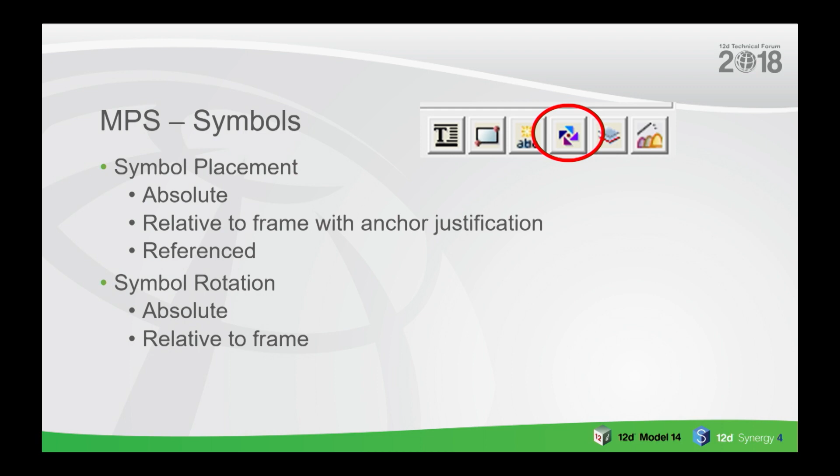Symbols, much the same sort of thing. You can place symbols absolute or relative to a frame, but you can also anchor them to a position in the frame, like a north point. You might want to anchor it to the top left-hand corner of your frame. The other fantastic thing is the symbols can actually rotate as well. If you rotate your view, the symbol will rotate to it too, relative to the frame or absolute.

We had another option in there called plot millimetres to units, or plan units, or something like that, and we only had 3 options we could ever use. Now it's unlimited. We can select many different models that will plot in different spaces. A lot of people will use that for plotting notes on the sides of their plans.

Some of the new features: what you see is what you get, like a preview, which I'll show soon. Auto PDF file naming, so it will use the chapter name, your book name, or your page name, or you can have overrides and also attributes.

The one that I love is view favourites. How many times has somebody gone into your job and turned off a model, deleted a view, or done something? You can use your view favourites to set in your plotting.

Whiteouts behind the frames - this one is really cool. It was asked in the survey conference: highlighting your current frame in a detailed plan. You might have many frames running along the road, but which one are you actually looking at? It will actually highlight what's there.

You can plot just the book only, the chapter, or the page, and referencing. I'll go into referencing a little bit later.

There's a really nice flash menu on the MPS. The refresh button is just a treat. You can make views, notes, symbols, or anything active or inactive. You can insert new, that's the button that actually gets something to start. Copy and paste, I'll show you an example of that. Moving up and down the tree. And also, this is another one: applying a map file to a frame.

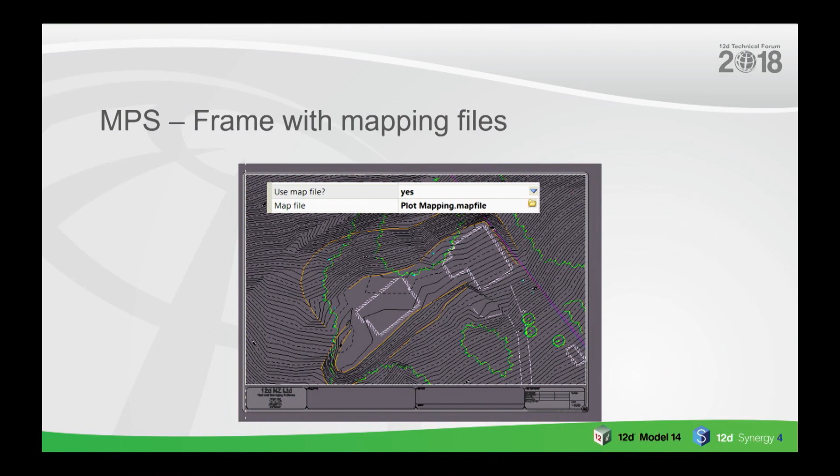How many times have you got your contours all pretty and green, but you want your contours on a plan and want to dumb them down, so you can apply a mapping file to grey those things out? Or you might be doing a stormwater plan and want to show the other surfaces, so you can grey out those other surfaces by running a map file. So that's a frame without a map file, and that is with one. You can change the colours just by applying the mapping file.

The magic chapters: the limitation of a single frame is you can only do one cross section at a time, or one long section at a time. What this is going to do is let you have magical cross sections appearing, long sections, your drainage long sections, and also a model of plot frames. So you might have a whole lot of plot frames placed down a road, and it will plot all of those.

Now, for my magic, I need probably one more number. Could somebody shout out another number? Any number? 8. Okay, 15, thank you. So, actually 8 and 15 are a bit too easy. The 15th prime number, I imagine one of you guys will know whatever that is. We need a programmer - pick any programmer that you want. Peter Tatum, okay. This is so easy. 8. Somebody worked out what the 15th prime number is? 53. Thank you. 8, 53, and Peter Tatum. That's going to be harder.

Okay, now I'm going to go live.

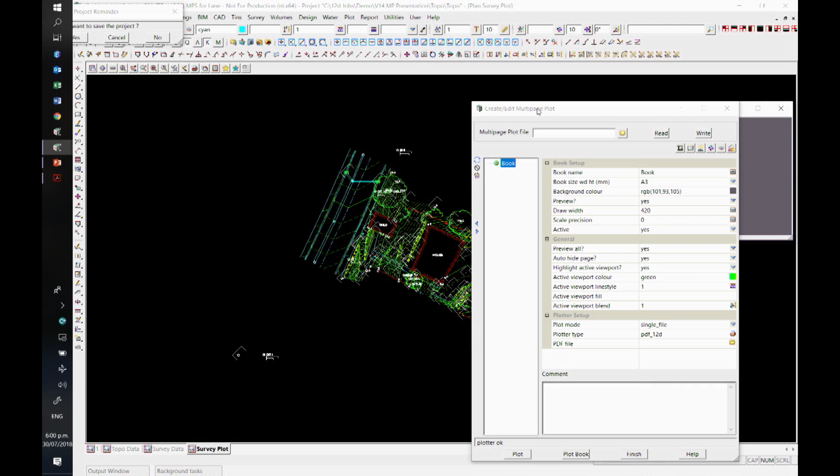Now, just doing a simple plot. I just want to create a quick plot to walk out the door using MPS. I just go plot, multi-page plot, and create. We've got our panel, we've got our preview, and like anything else, you would actually read in a standard file. So I pick a file, read, pick this one here, and read it in. This is one that I've actually just created.

So I've got a few standard things in here. You've got your title block. I've got some text with word draft. I've got my page numbers, some CAD notes, which you can select a model to actually refer to. And I've got my plan frame with a north point.

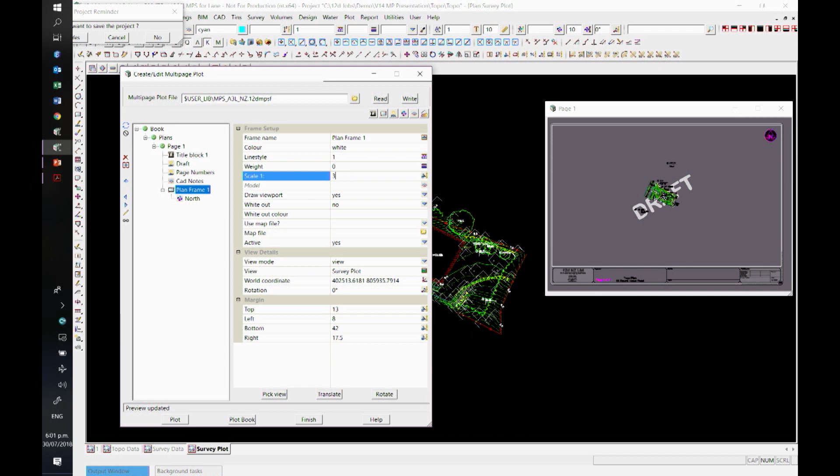So I want to do a plot, pick my view, pick, accept, and change my - so I've got my view in there, looking good, change my scale. So that might be 350. You can use any scale you want, as long as you have a scale ruler with that on there. You can see I was really fun with my tech drawing teacher.

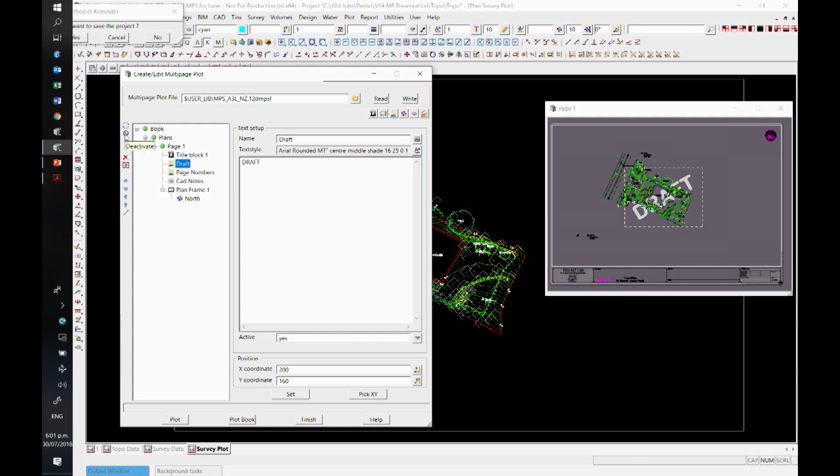I don't want the draft, so hey look, all I do is just make that inactive. So that's now inactive. Really it's just a matter of going plot, and that's it. And that's going to go and generate my plot.

A couple of things that happen - the plot sizes have really been reduced quite considerably. I've got one that has many, many pages, and it's about 8 megs or something like that. This one will come through at whatever size it's going to come through at. It's going a little bit slow because my computer doesn't like working through a projector, I don't know why, but yeah. But that's a plot - it didn't take very long at all to actually do that. You can see that it's quite simple and quite easy to do.

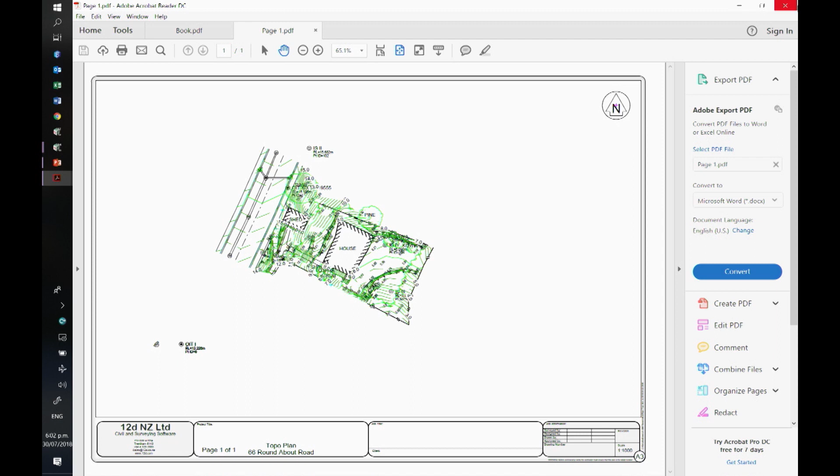So I just close that one down. If I was going to make one of these up from scratch, quite simple: plot, multi-page plot, create, and there is a magical button - this is it here, it's called insert. You can't go anywhere without using that insert, okay? You start trying to build something up, you've got no hope.

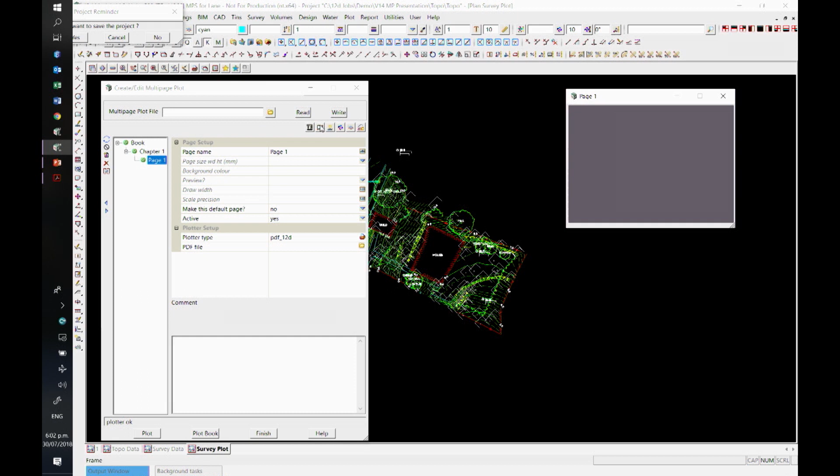So magically insert a chapter and then a page, select your frame type, plan, and then you can just draw a frame. Really easy. You've got all your nice edit tools now, you move things around, really comfortable.

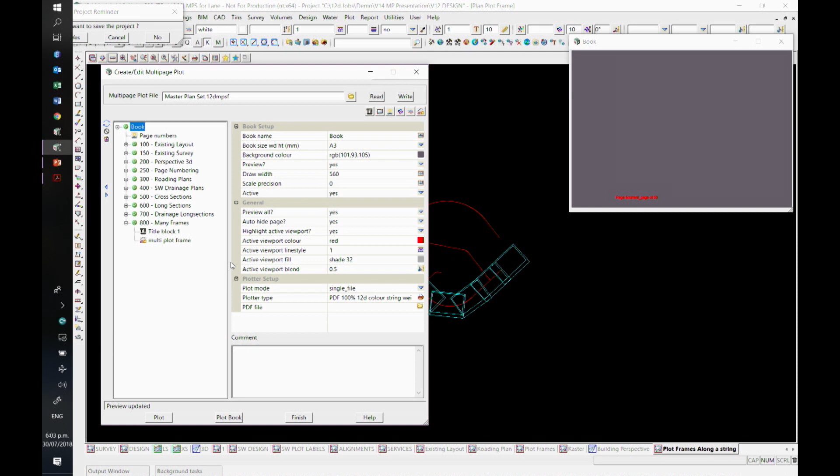But like every good presenter, we have a pre-done sort of file with a lot more information in it. I'll open this up and show you a little bit more. Am I going okay? Yeah, okay. So I've got a book level, and what we've got is defaults.

So what I tend to do is fill everything out at this book level, so everything else will refer back to the book, the major settings in that. So here's my preview, not a hell of a lot on there. If I want to change the size of my preview, I will. I'll just go up to 720 and just make it a little bit bigger so you can see. I'm not going to - obviously you'd probably have it a little bit bigger when you're back in your office with your triple monitors, and you can have that all over everywhere.

You've got a few options down the bottom here: active viewport colour, linestyle, and fills and blendings. So if you actually have a frame to be plotted, it will actually highlight in these particular colours. I'll show you an example of that.

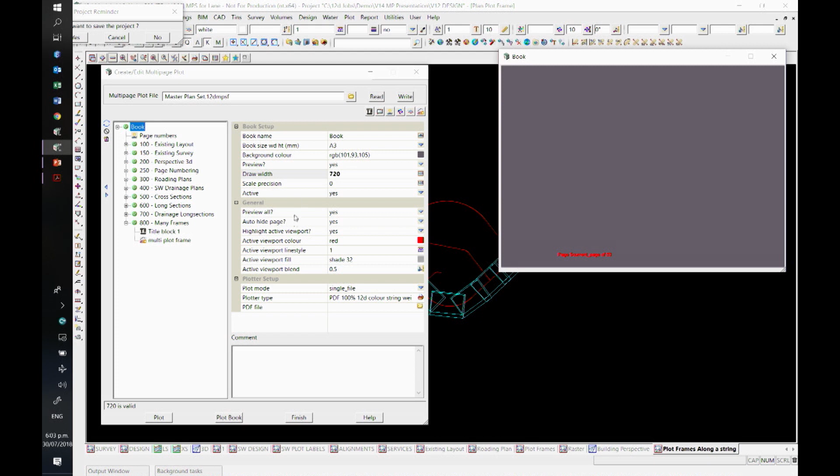I've got an example of my page numbers. I've actually got a cover sheet, and this cover sheet here I've actually made inactive for the numbers, so you can do all that. And I've got a title block that I'm actually not using anything on.

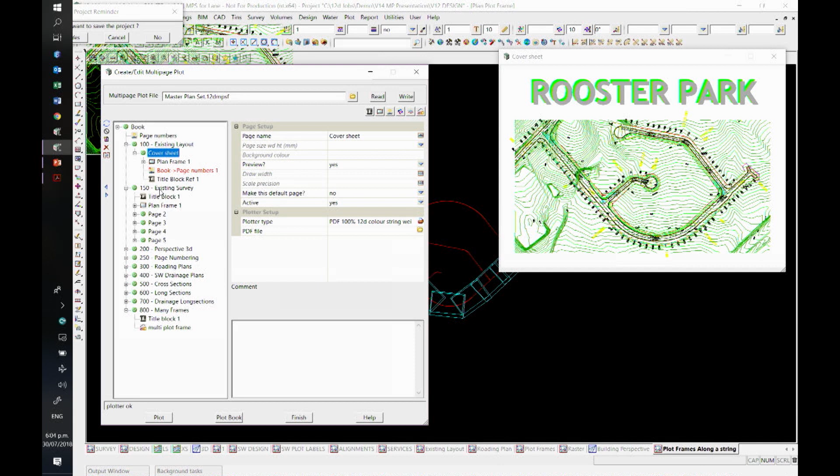My survey sheets - so what I've got is 4 pages. I've spent some time to actually locate the frames on my page correctly, to cover all of my area of work. I am referring to one single view, which is my plan frame, which is actually looking at my survey view here. And I haven't got any coordinates for my frame.

So at a page level, all my frames have their own coordinate and their own rotation, but I don't have a view selected here. So what that means is I can place my frames out, get one part of my tree all copied, all created, and then I would actually go and copy this entire chapter and just go and rename the actual view that it's actually looking at.

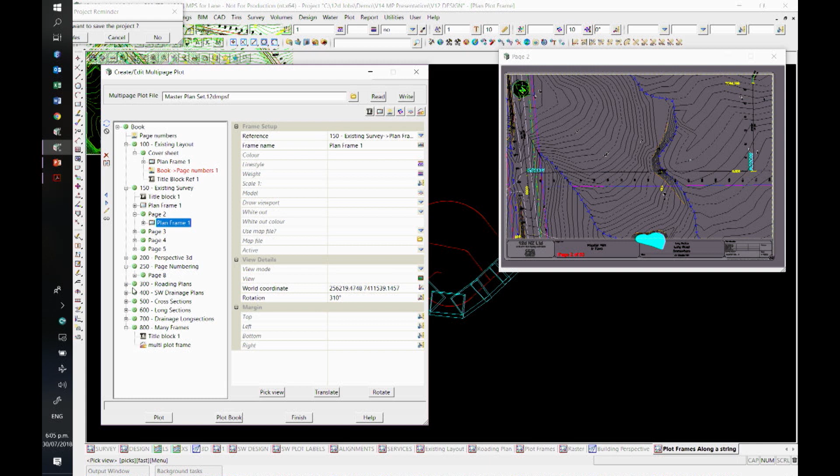So say for my roading plans, this is only just looking at my roading plan views. So all your sheets and all your frames will actually always line up into the correct locations. You can see here that I've got a location diagram, with all my frames there.

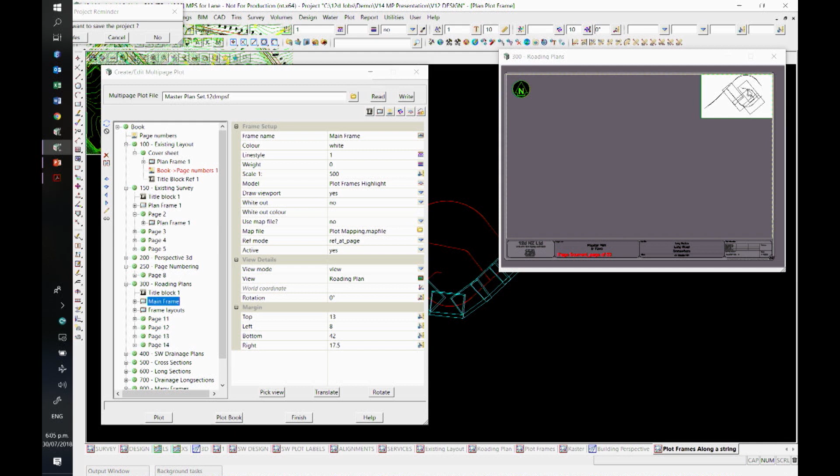When I go inside there, you can see how I've actually highlighted the current frame that I'm working on, and the north point has been rotated as well, associated to that corner.

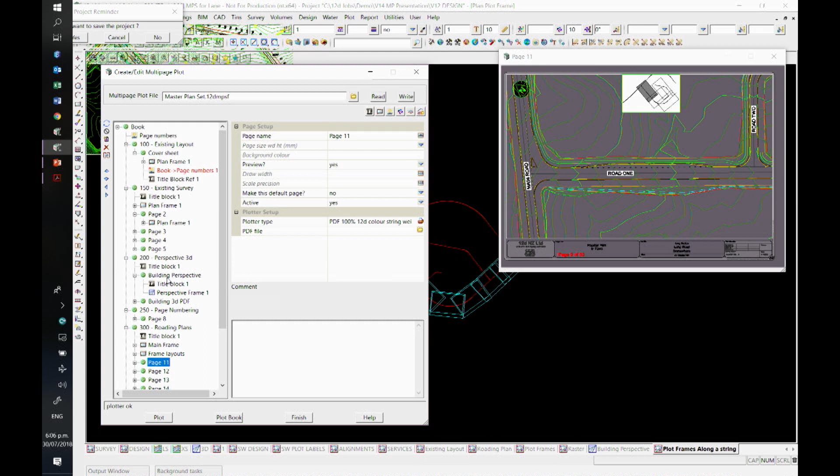I skipped one - which one did I skip? My cover sheet, my plan frames, my perspective views, there we go. So what we have is a perspective view. Unfortunately it doesn't highlight in your preview view, and I've also got a 3D PDF.

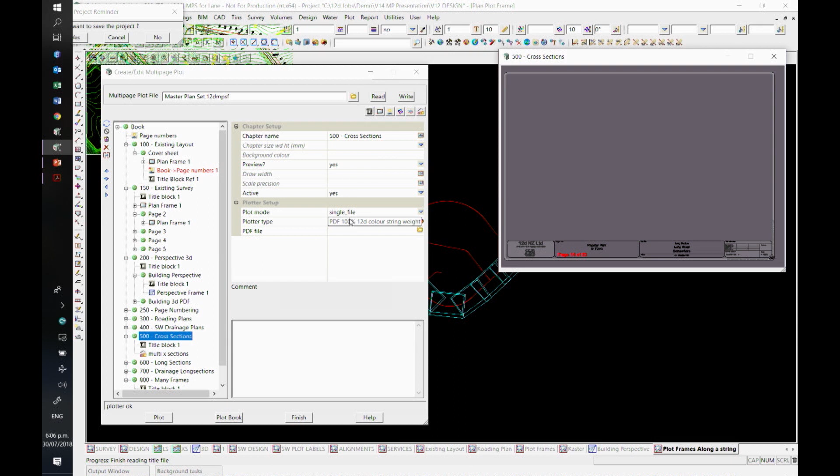I'll show you those once we actually open it all up. Going down a bit further, I've got the cross sections. All we do here is have our PPF and our overrides. I'm just doing a single model here, limiting the changes that I want to plot out.

But in my long section I've actually got a bit more information here. I'm doing a whole model of strings, so I'll get many, many sheets there. You can see I've got some standard notes - these are just looking at this particular model of my design notes, which is placed in paper space in that particular place.

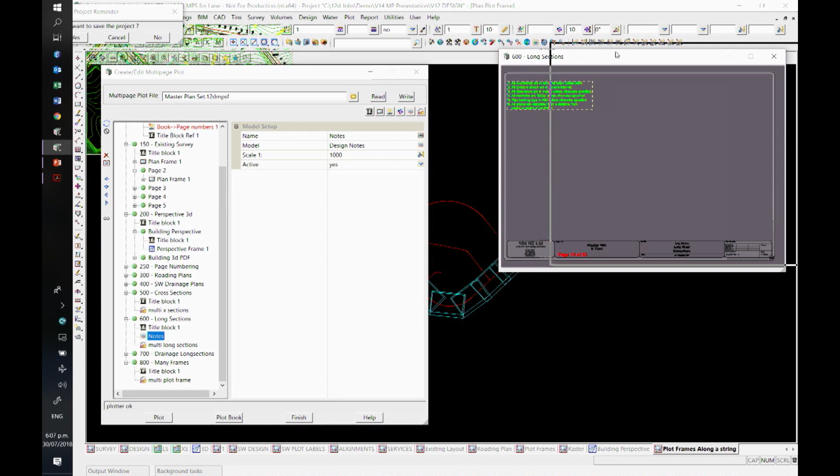Same with the drainage, okay? And the other option we have is obviously here - now what is it under? This is the only reason you're here, where is that kept? Plotting, plot frame, plot frames. Here we are - plot frames more, it's not hidden, and plot frames along a string, okay?

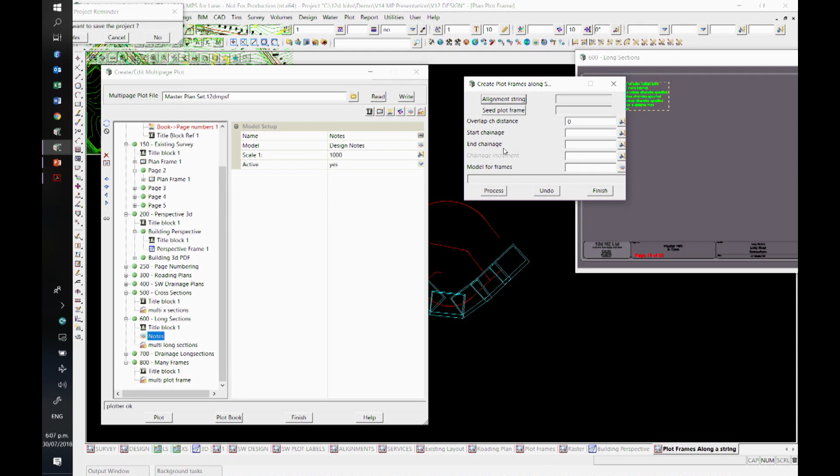We use this old macro from way back to actually just place all of the frames in the background there along a string. And then what we do is we specify in here that model of all of those frames. So we just say, hey, all of these strings, all of these frames, and it will just pick out all of those.

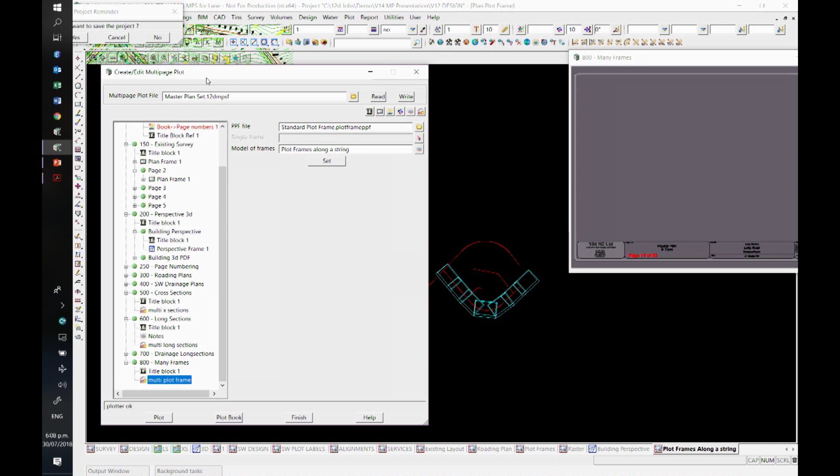What have I forgotten? Oh, you've got some nice tools, yeah? Just one thing I want to add is when you've got the multi-pages, MPS will take into account the number of pages in total. That gets automatically generated if you have the dollar current page and dollar total pages variables. Well, that's just about it.

Oh, my magic, hold on. We've got to show you what it's actually produced. Okay, so here's my cover page, Rooster Park.

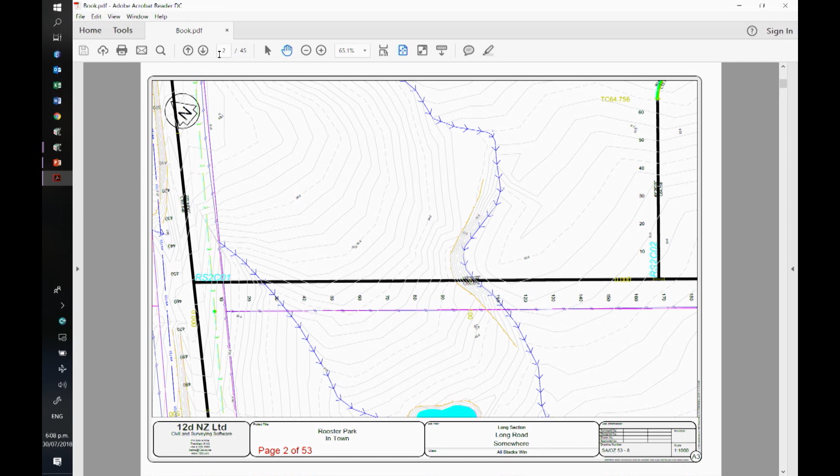Don't look at my CAD work - I've seen some really good examples of some really good plans. But here's down the bottom, pages, number of, somewhere around... All Blacks win.

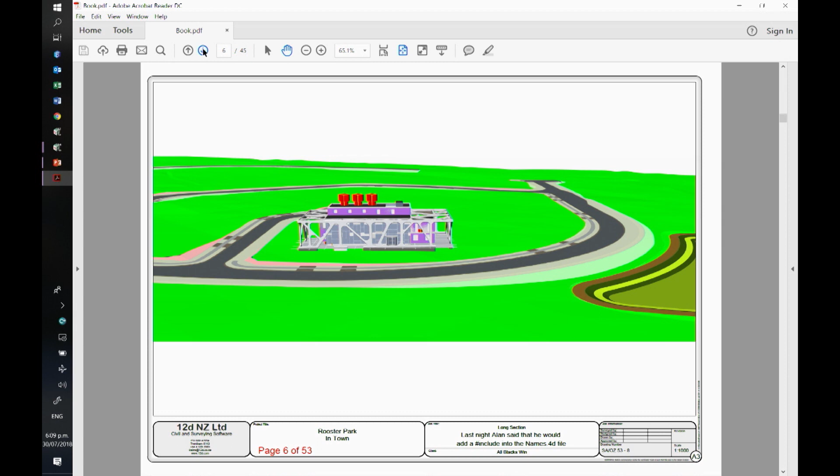Just going through the different pages, it's really cool. I think we all got issued with a standard PowerPoint presentation, and also the same building - cow eating grass and a nice little picture across there.

Yeah, last night Alan said that he would add the include names. Yep, okay, good. I'm just waiting for something to happen here.

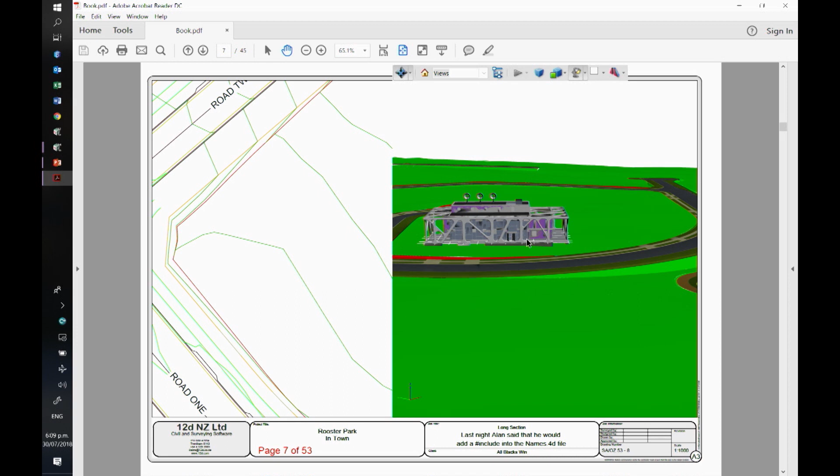There's my 3D PDF, so we can actually start looking that around. In New Zealand, we clap for something that's really good.

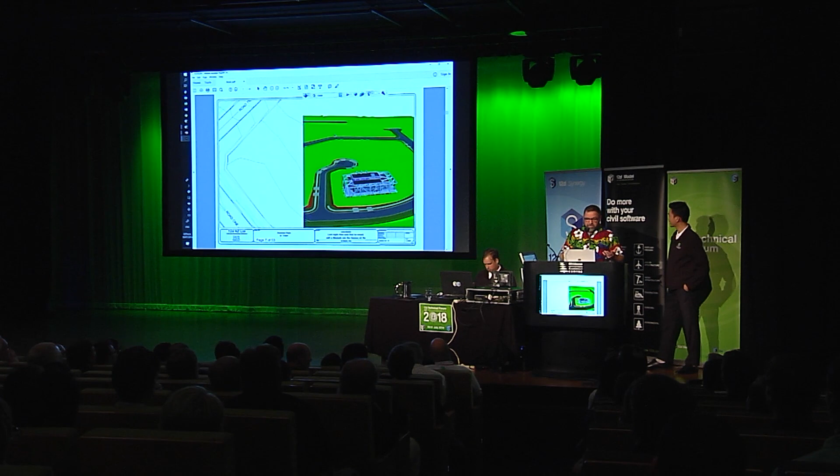So that's - there's 53 pages. What was your prime number? Prime number 53. Hey, magic, eh? What was the other number? 8. Oh, so it must be page 8 of - wonder what this is going to have. And Peter Tayton. Oh, that's pretty good, eh? And it's also Peter Tayton's birthday as well. If you add 53 and 8 together, you get 61, and add 2, that's his birthday.

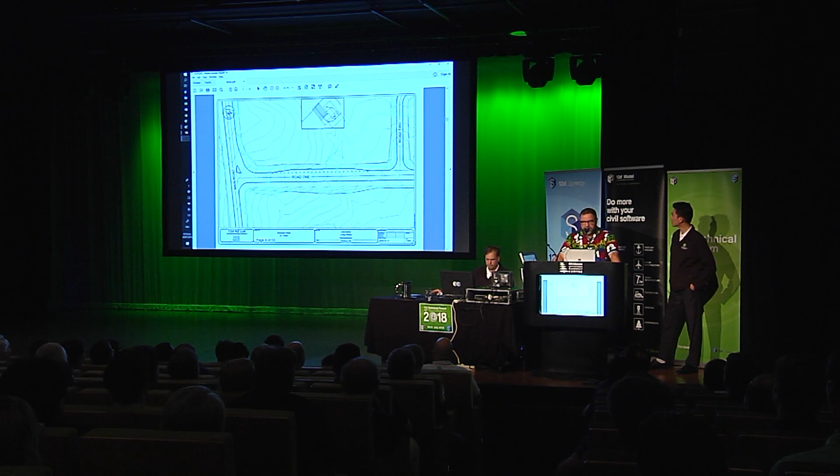But this, I think this is pretty magic stuff, this sort of plotting with all of these highlights and things like that. I think that's definitely answered the question of somebody in the survey room today.